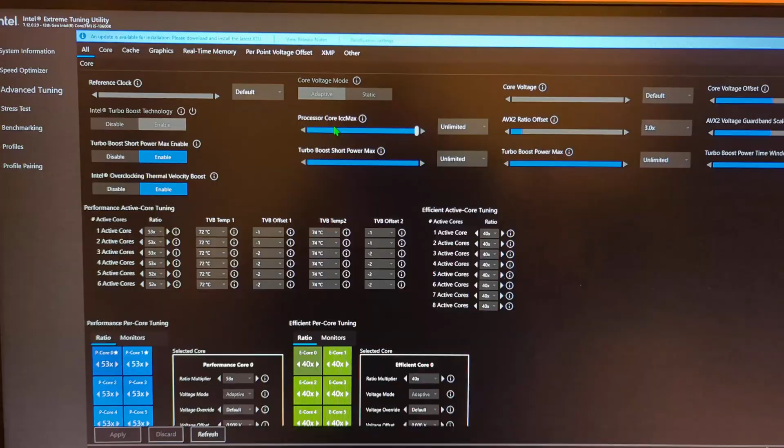It gets it right. Okay, I'm just gonna flip my screen. Sorry about this, guys. Here we go - it's more convenient just to flip my camera like this instead of running a screen capture. But basically, up here, core voltage mode.

You probably see these guys online, and I've done it - I've taken their advice and gone for a core voltage offset to try and drop the voltage. You can undervolt your CPU, but yeah, this is the thing - when you undervolt your CPU, you might come here and think, okay, let's undervolt. No, this is going up.

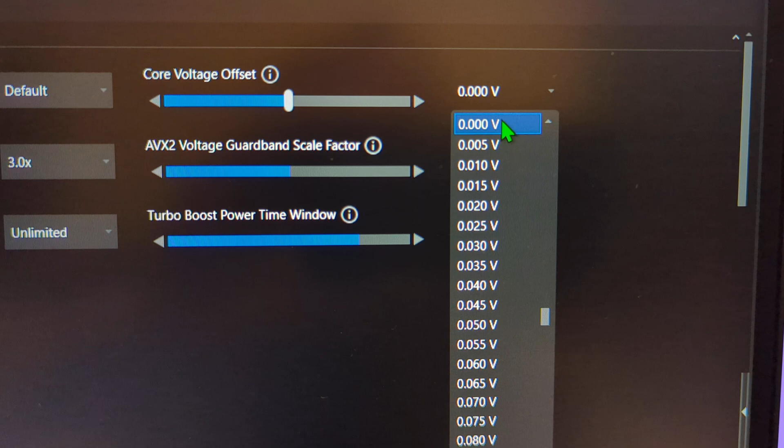Yeah, I've got to mention this, guys - I've made this mistake in the past. If you're looking to undervolt your CPU, bear in mind these are positive figures. This is going up - you'll overvolt it if you just go up like this. You have to scroll up here, there are the minus figures. Don't make that mistake, guys, okay? If you're undervolting, make sure it's a minus figure.

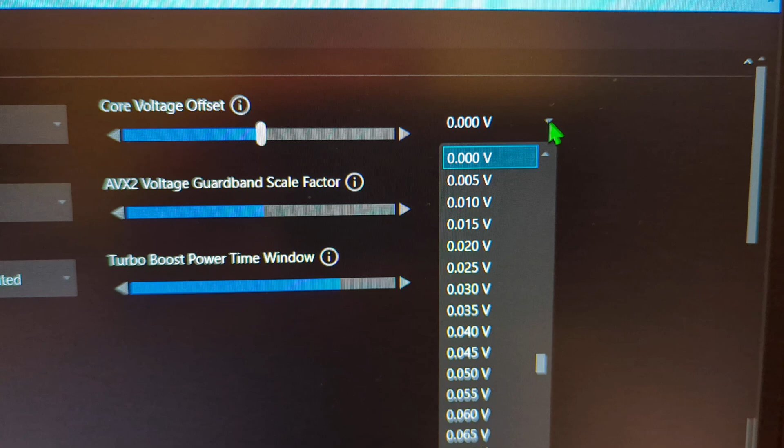It's a little bit confusing because you come here and you can't see the minus figures. I think it should default in the middle somewhere, so you can see, oh yeah, I need to go that way. Yeah, I think it was my office computer - I was like, oh yeah, let's undervolt, going up here. Oh dear.

Not good, especially when you consider you could cause damage to your CPU that way, if you just keep going up thinking, oh, I'm undervolting, but you're not really, you're going the other way. So if you go into undervolt, bear in mind, you've got to go for the minus figures. However, you might want to just leave that alone, because you don't really need to - you're not really going to save much heat by undervolting, you will save a bit of energy.

It's like, seriously, is it worth it when you could change this from adaptive to static? That's what I've noticed, and then you've got all kinds of problems. When you tweak some of these settings - I can't remember if tweaking that changes this automatically from adaptive to static - when it does that, you may experience startup problems. Your computer won't start, and you're thinking, what's going on, you're playing with all these things thinking, come on, what's happened here?

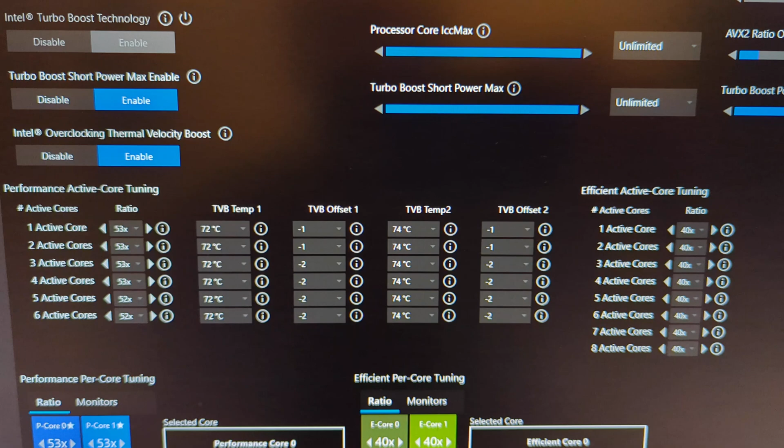Basically what I found was I'd unplug my game controller, for example - I've got a black screen starting up. I just unplug that, or an external hard drive, and then, hey presto, the computer starts straight away. The reason for that is because you're not getting enough voltage. You've been messing around with voltage settings, and now it's changed that from adaptive to static. So when your computer starts, your peripherals are causing it not to start up because you're not getting enough voltage supplied, which is why it's best just to leave that on adaptive. Again, it knows what it's doing, okay?

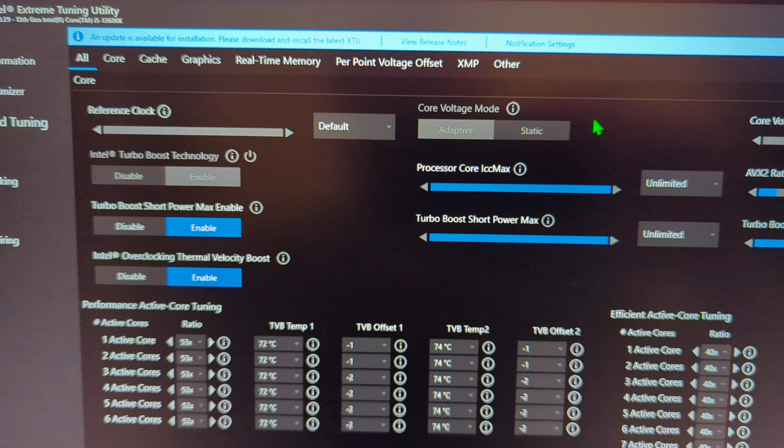Now there's a really cool setting with my motherboard. Actually, my older motherboard, the office one, has this setting, so this one's definitely got it, and that is V-core voltage mode, adaptive plus offset. So there's an adaptive and fixed mode in MSI BIOS, but there's also an option for adaptive plus offset. So you get the best of both worlds.

Yeah, you get to undervolt a bit, try and squeeze as much out of it at the lowest possible voltage. Or if you're extreme overclocking the other way, go a bit more voltage without that coming off of adaptive. So that's great. That's one thing it just knows how to do, okay?

Automatic voltage settings, this adaptive thing. That's because the user isn't going to know exactly how much voltage each and every component in the PC needs 24/7, the whole time it's running. But the system will, so just leave that on adaptive, I find.

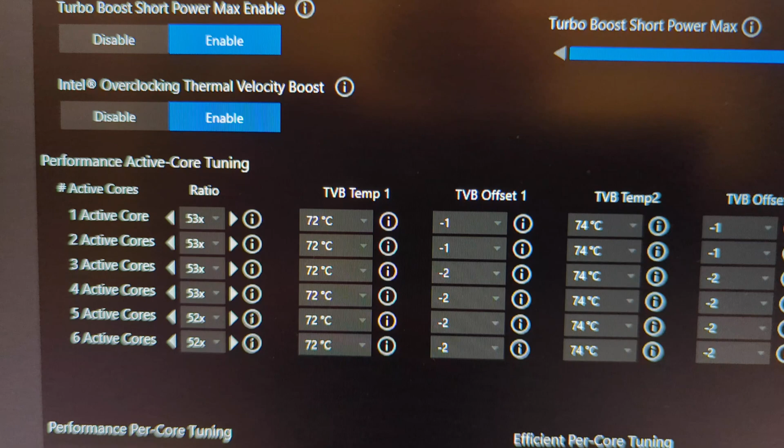Now, the other thing, this is something with previous versions. I don't know if it's because it was early days for TVB, thermal velocity boost, but my older system couldn't get this thing right with thermal velocity boost, where if you enabled it, it would automatically underclock your system by silly amounts, like drop it to less than 1 gigahertz because it thinks it's idle.

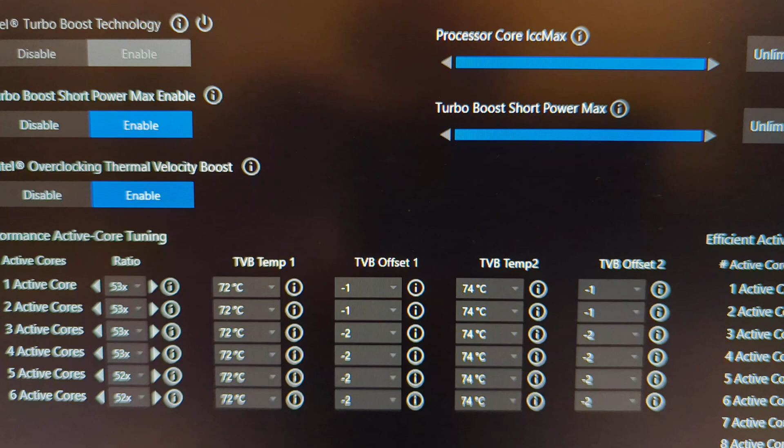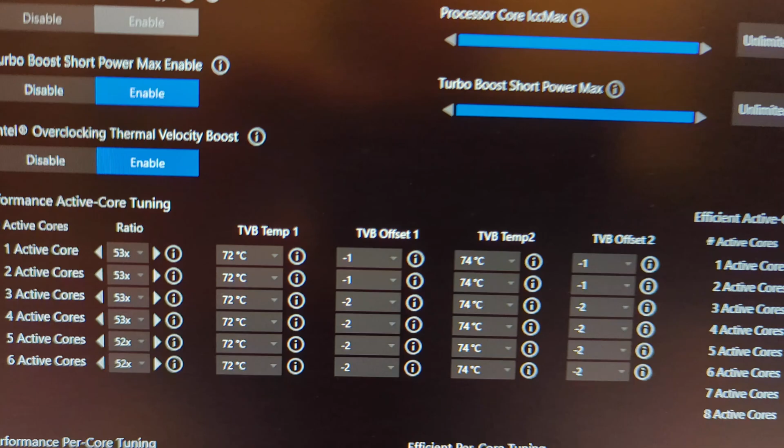Oh yeah, nothing's going on, I'm going to drop it to less than 1 gigahertz, and you're like, what are you doing? Leave my CPU alone. I want it at 5.3 constantly. You don't drop it unless there's a temperature issue, right? But that older system just loved to do whatever it wanted if you enabled TVB, which included underclocking way too much.

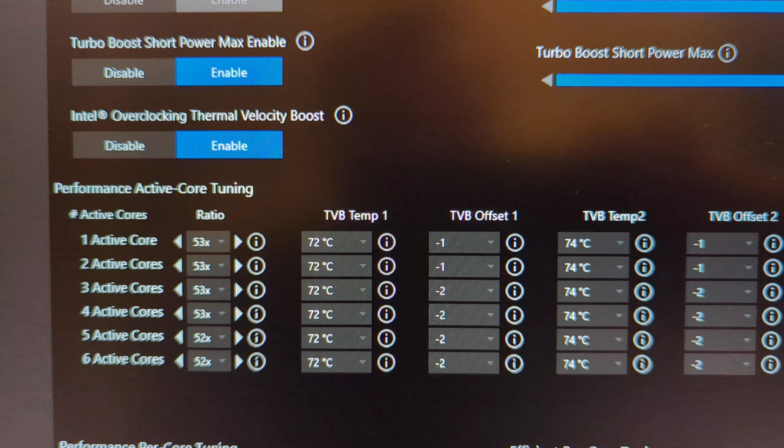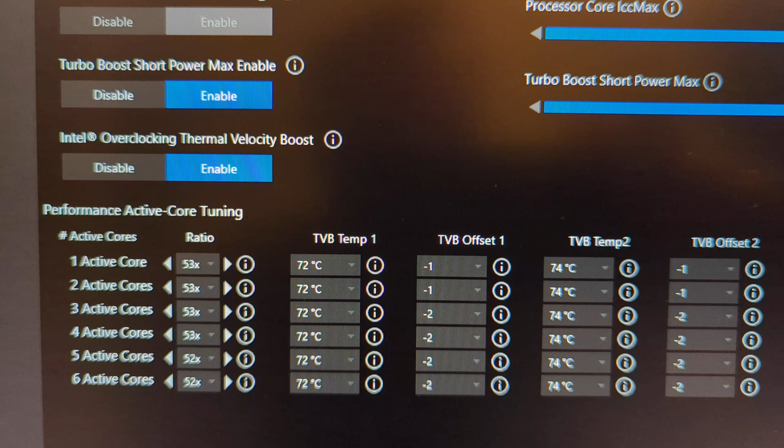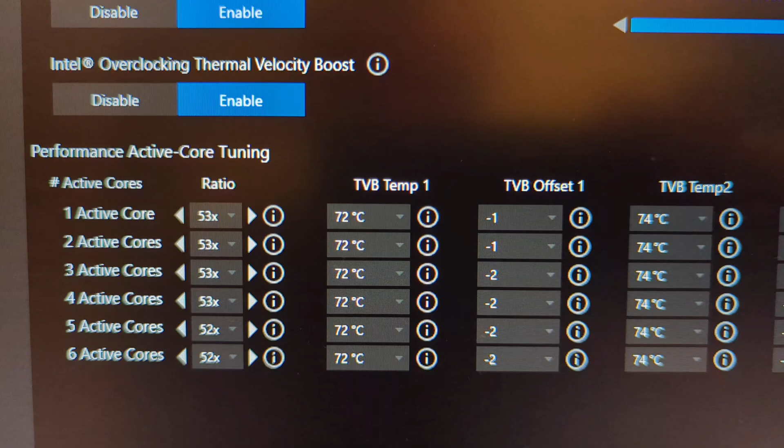However, this newer system, my 13th gen i5, my 13600K, doesn't do that, number one. Number two, it has all these extra epic settings. TVB has come a long way. Maybe it was early days for it, and that's why I couldn't use it with the older system, and I had to settle for a fixed VCore, fixed ratio, because it just didn't know what it was doing.

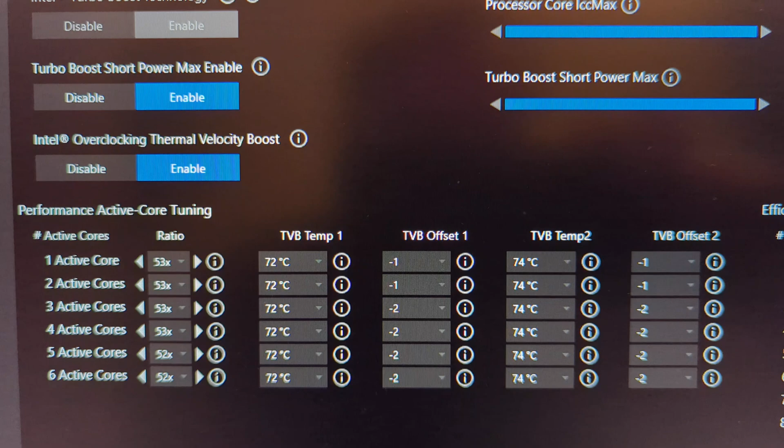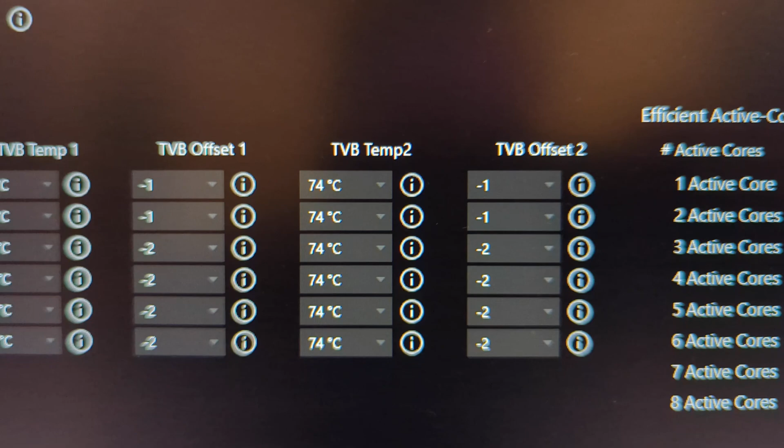Now it does. Now you can enable TVB and say when you get to 72 degrees, drop 1 on cores 1 and 2, active core tuning here, very specific, amazing. Once it then gets to 74, drop another 100 megahertz. But those other cores got hotter than cores 1 and 2, so I've had to tell them to drop a couple of increments each time, 200 megahertz each time. And it gets it right, guys. Really impressed with TVB now.

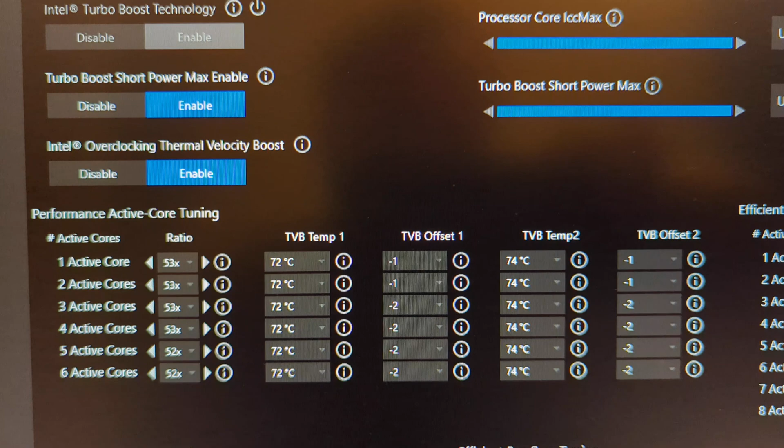But with my older 10th gen CPU, I was a bit shocked that not even the 10th gen CPUs can use TVB to its full potential, that it was still early days, and you don't get these offsets. Even when I went in the BIOS and tried to do it that way, it just wouldn't get it right.

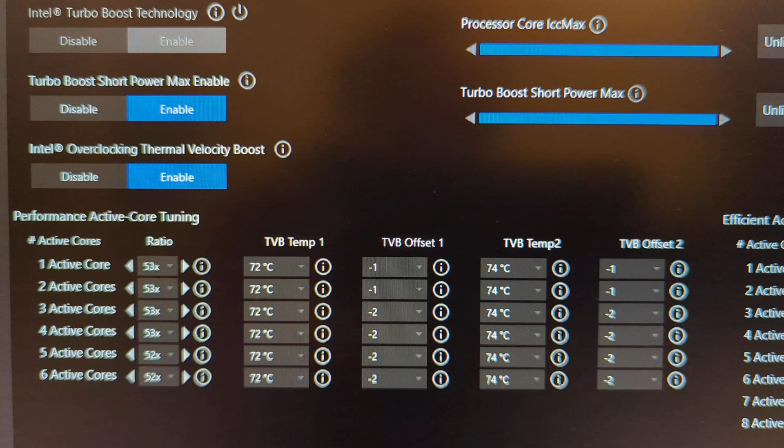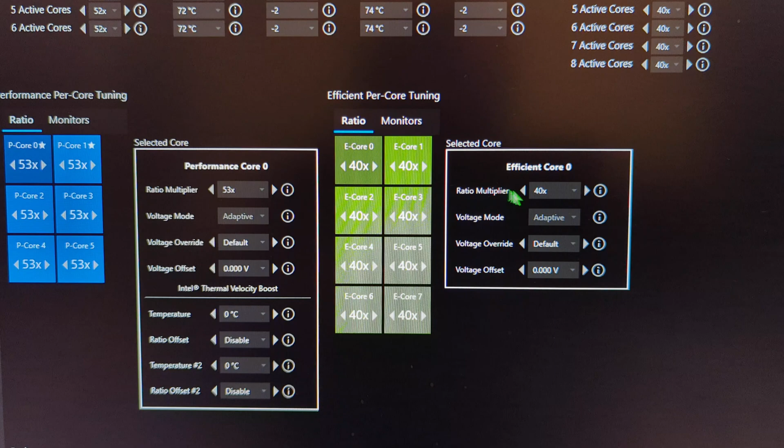Anyway, there we go. Quick video. Best way to go is leave everything default. Don't play with this. It defaulted to 4.5 with processor cache ratio, and me, being an idiot, thought, why is that at 4.5? It needs to match my active core tuning up here. It should be 5.3. No. Perhaps with other CPUs I've had, but not this one.

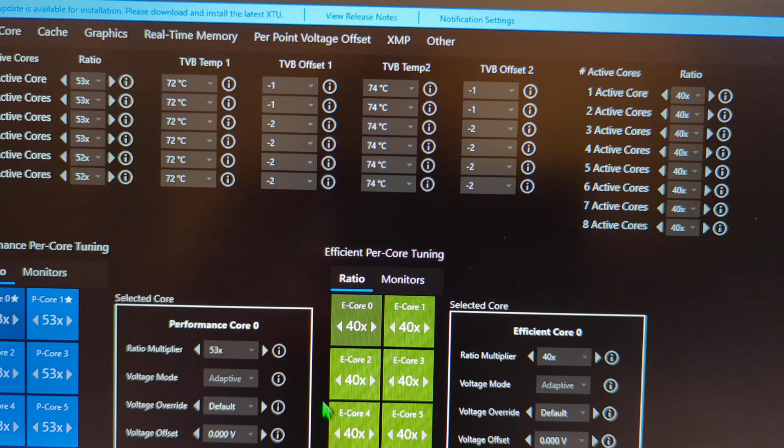When it resets your overclock settings, you'll find that it's set this to 4.5. Leave that alone. Don't play around with this, don't try and match it. Leave that and that default, and just tweak these. We've got 5.3 on cores 1 and 2, 3 and 4 as well. I've got a new fan and managed to drop the temps a bit, so I went quad core 5.3.

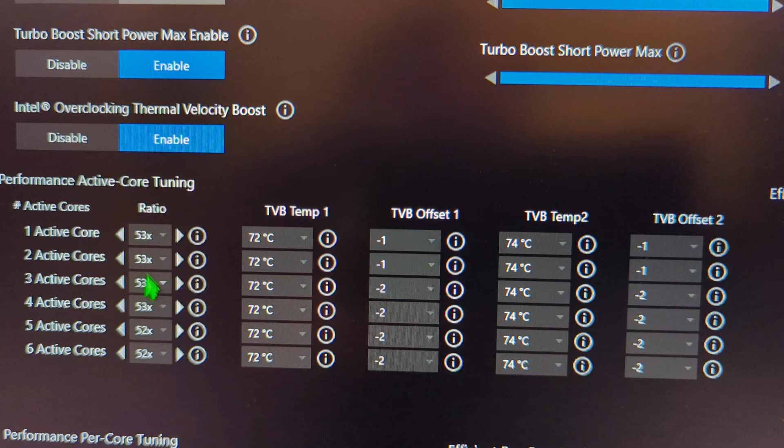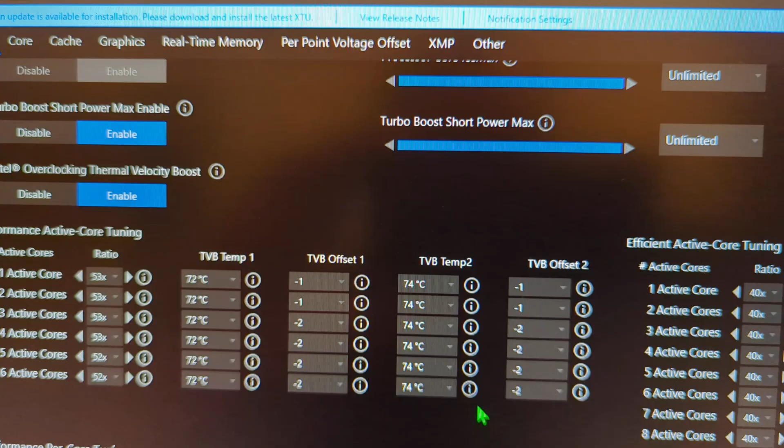And whichever cores get too hot, drop the increments a bit more. With these settings, I don't exceed 84 degrees, and if I did, I'd probably underclock, and that's in Cinebench, guys. Now, I think it's even a bit less. What did I get the other day?

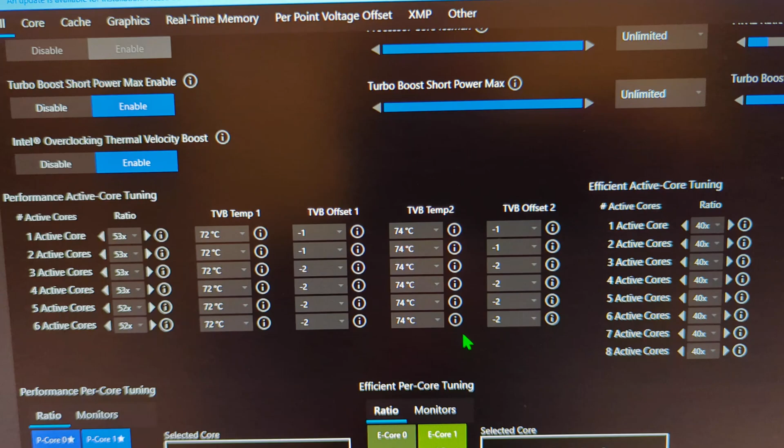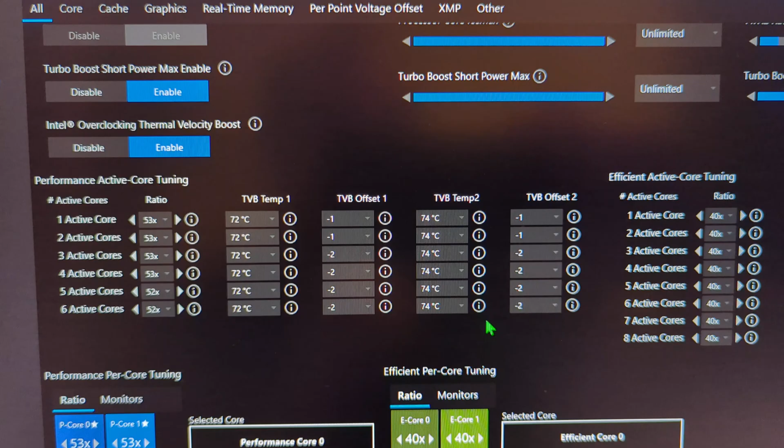I got a new fan, a Noctua, premium fan, and it actually dropped my temps. It was a case fan. I put it on the side of my case, pointed pretty much directly at the CPU, and it dropped the temps by 7 to 8 degrees. It was amazing. I was getting 85 degrees temps.

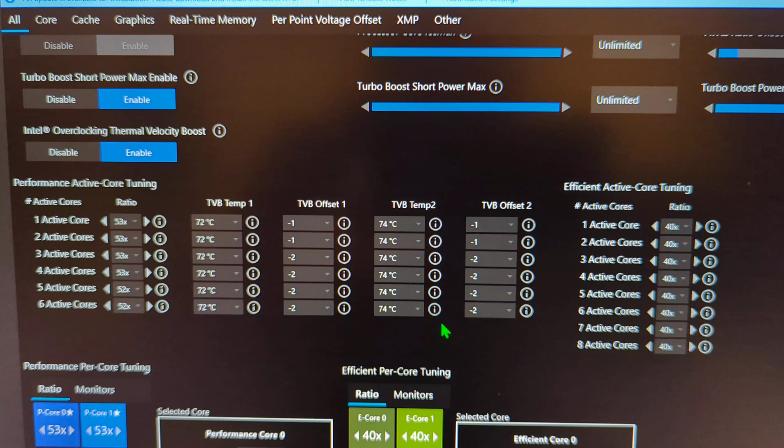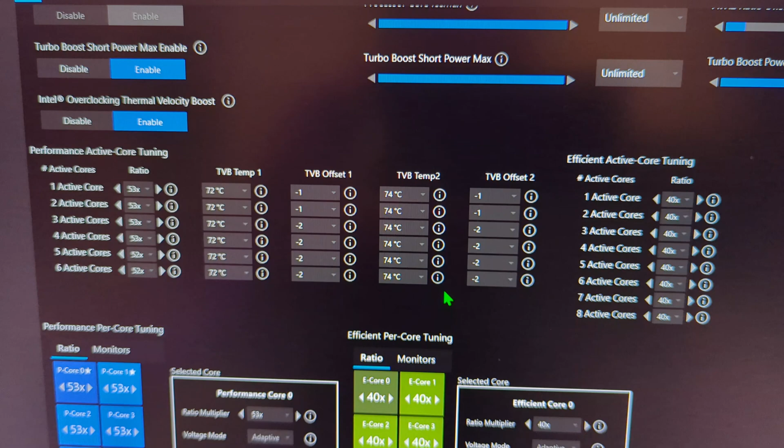When I fit this fan, 77. Full load, Cinebench. Although Cinebench, it's not a foolproof benchmarking tool. It doesn't stress test it as much as some games will, which I was surprised at. I thought this must be some kind of 4K video rendering thing, or even 8K, if it's really stress testing the PC. Okay, if it passed Cinebench and I get decent temps, I'm alright.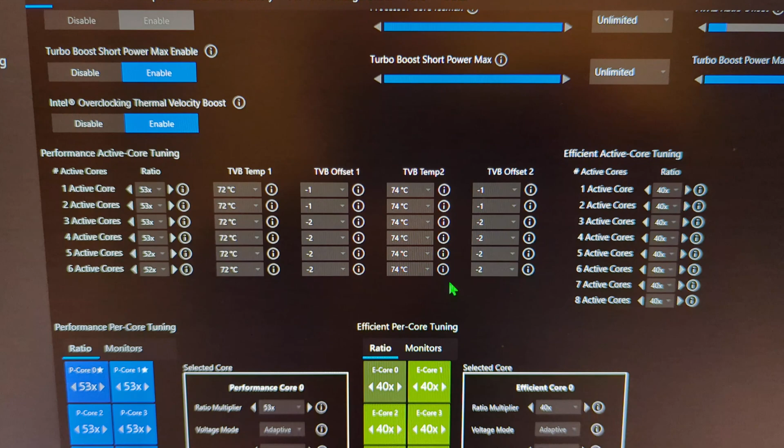But I've had instances where I put a game on, and that does stress test it more than Cinebench. So yeah, test it also with your most demanding game. For me at the time it was Warhammer 1. For some reason that gets hot. Yeah, which is interesting because Warhammer 2 doesn't. Yeah, I think it's just inefficient. Warhammer 1 is making the system unnecessarily hot. But yeah, I test with Warhammer 2 now because I'm not really playing Warhammer 1.

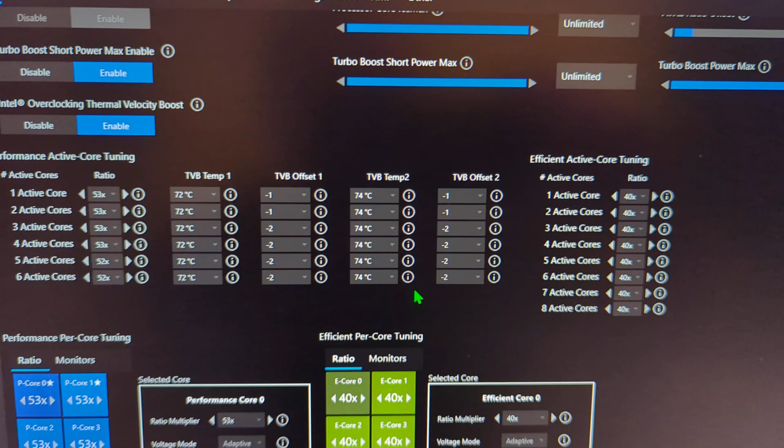Back in the day, here we go, show my age here. Back in the day, it would be, can it handle Command & Conquer 3 Brutal Skirmish? If it could handle Command & Conquer 3 Brutal Skirmish, it could pretty much handle anything, okay.

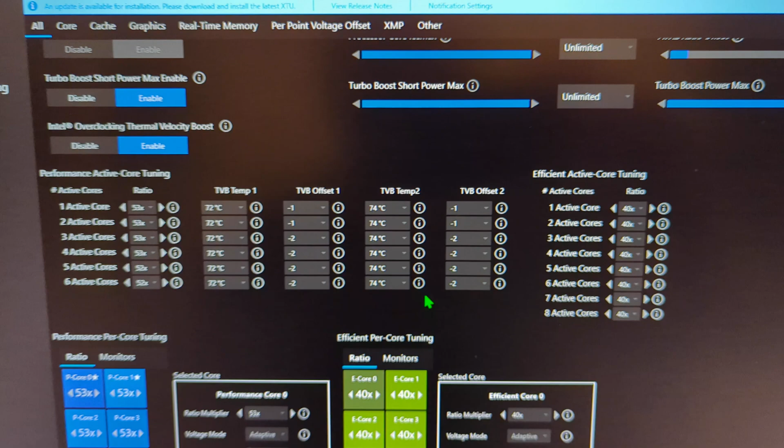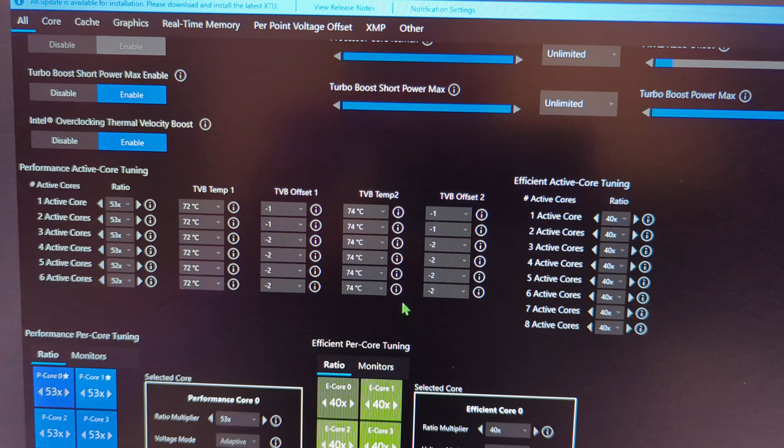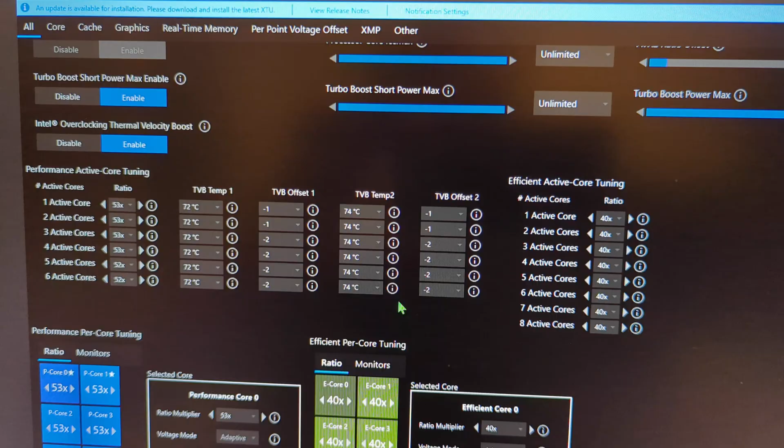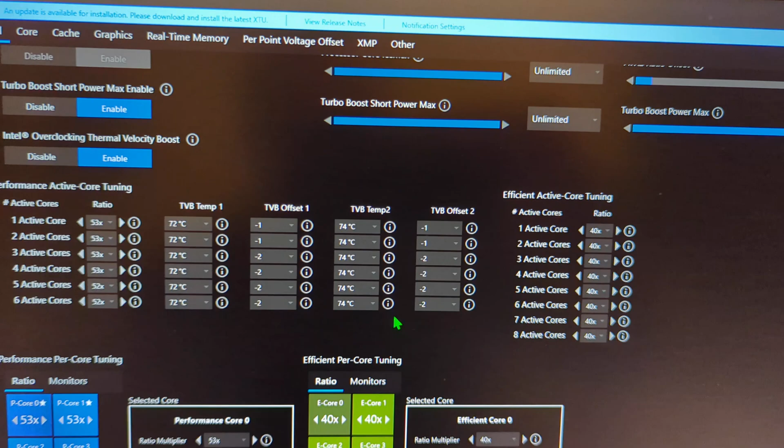I mean, I rate Command & Conquer 3 as one of the best games. And you probably think, well, why? It wasn't that great. It's because of that Brutal Skirmish mode, guys. Play Command & Conquer 3 on Brutal Skirmish and you'll know what I'm talking about, if you can handle it, that is. Yeah, if you're good enough. I found out how to beat AI a long time ago. You find its little weakness, you cheat essentially, as AI does way too often. But it's not really cheating, it's just strategy. You find a strategy that works and you double down on it, and you do so as quick as possible so that it can't adapt. That's how you beat AI. Maybe not in the future though, because it will be too good at adapting. Oh dear. Now, I'm going to tell you how to win on Command and Conquer 3 Brutal Skirmish. If you're playing as Nod, get as many of those Venom Viper aircraft, up to 50, and then just right flank the enemy. You'll come into their base, they'll be unprotected on one of the flanks, and you can just blitzkrieg the guys. That's how you win, even if it means sacrificing some of your base to do it. It's tactics like that is how you beat AI, okay? Yeah.

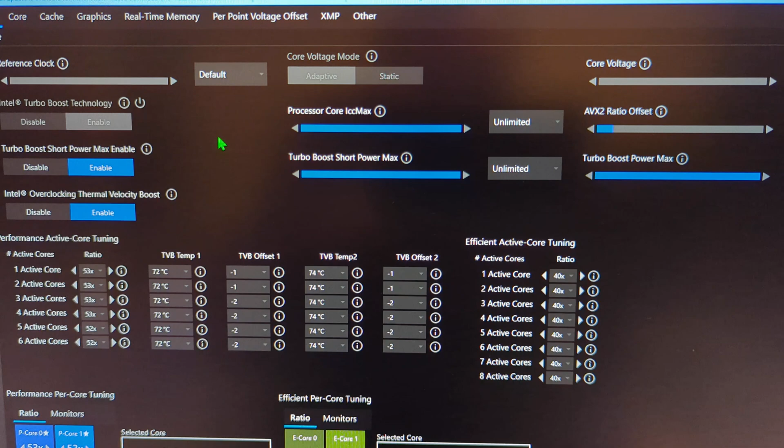Anyway, there we go guys, another video on how to overclock and make the most of Intel Extreme Tuning Utility. Download this guys, okay, it's epic. Oh, I've got an older version here. The office one is 7.14. And trust me, I've tweaked so much trying to get anything to work, everything and anything. And just leave that on adaptive, okay. It's the best way.

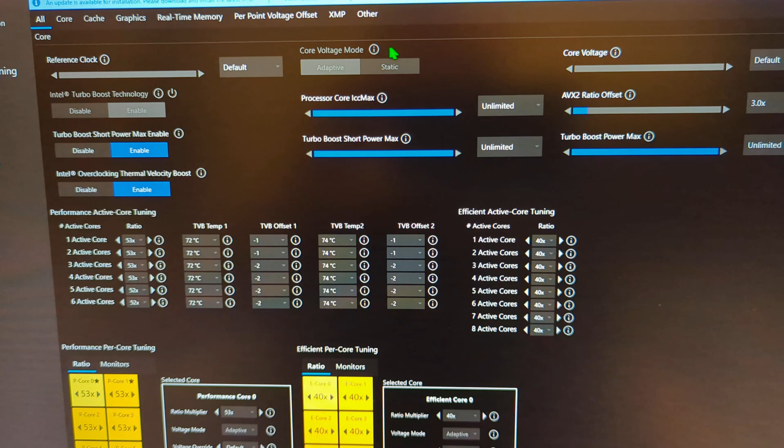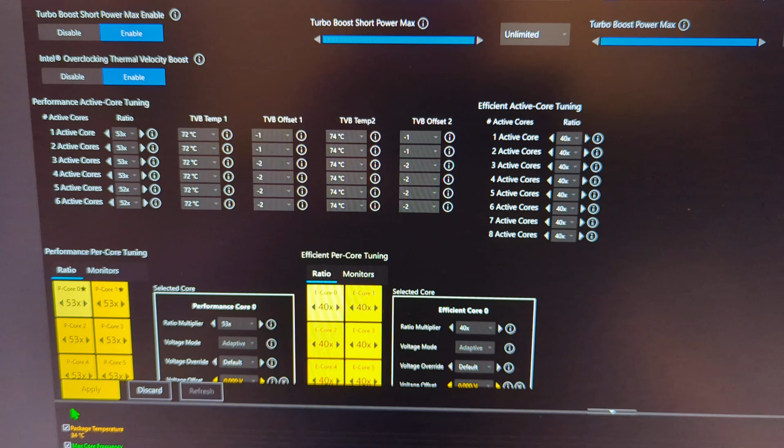Only undervolt if you absolutely have to, and bear in mind it might switch that to static, which you don't want it to do if you start tweaking here. I'm not sure if that's the case with the... Okay, let's just undervolt a tad and see, is it going to switch that from adaptive to static? It might not on this one. No, good. It must be set to adaptive plus offset. So I could drop this a bit, but I'm not going to. Yeah.

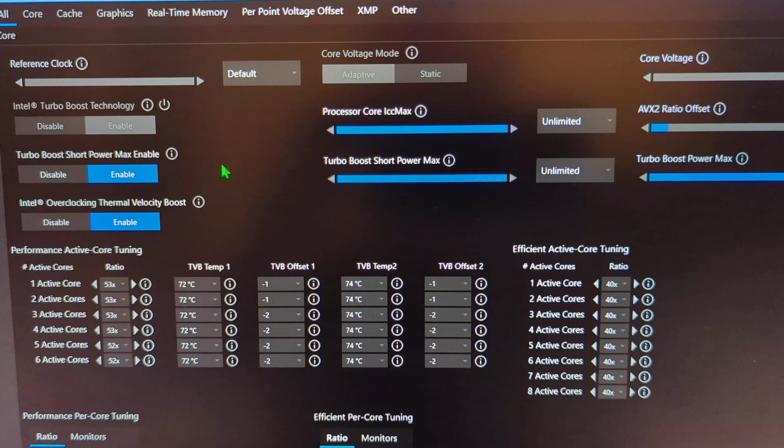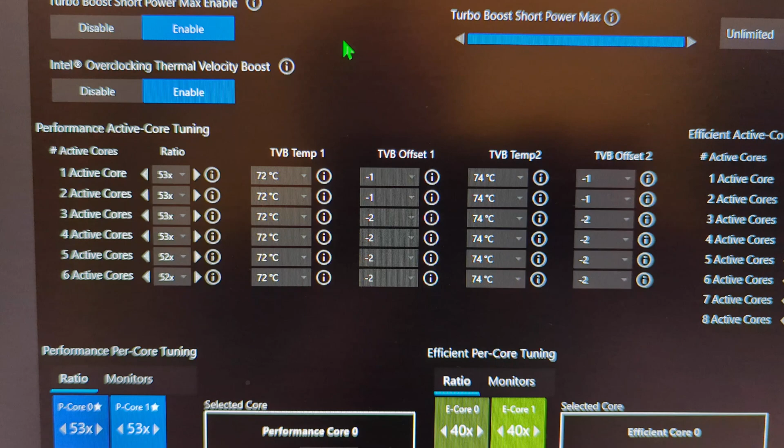And if you're using an older CPU, you may have to settle for fixed override. But the problem with that is, if you've got to do that because it doesn't offer stuff like this, then you can't really get the best overclock. I think nowadays you've got to go for a 13th gen so that you can get a great overclock out of it using these settings, which you don't get with my 10th gen. I don't know if it's just me, but my 10th gen i9 in the office doesn't have these options. Yeah, gutted.

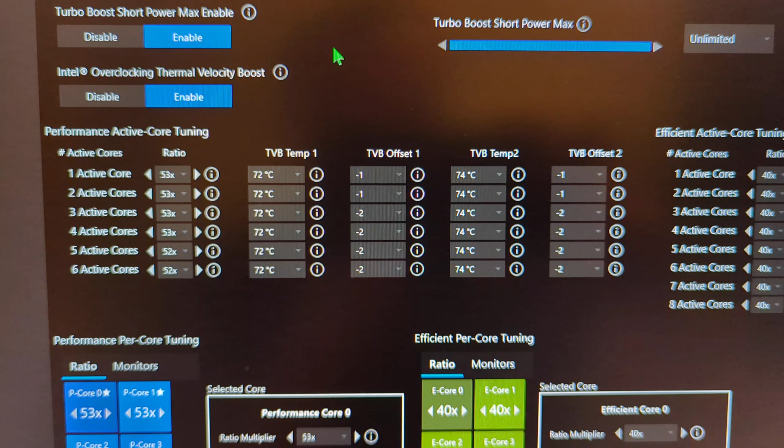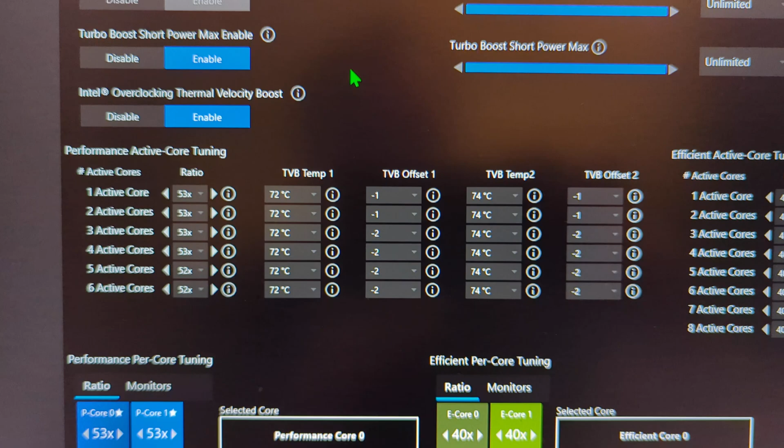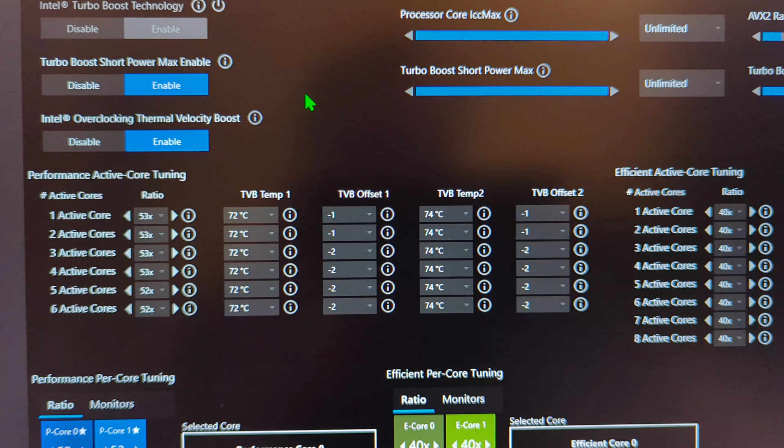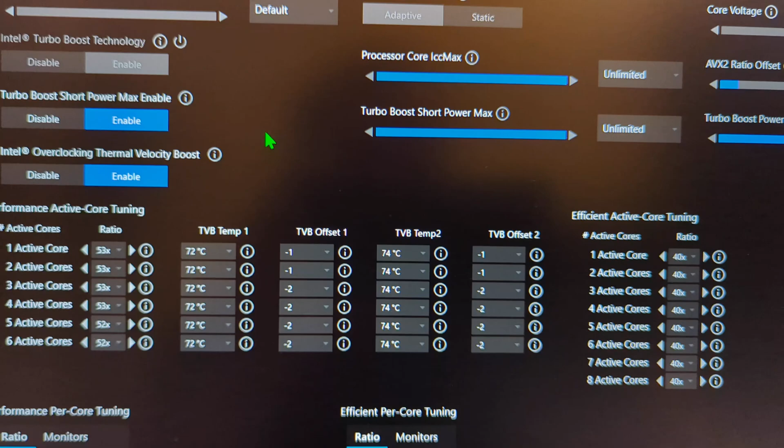So I've had to fix it at 4.6 gigahertz, which should be doing 5 at least. But because I can't fine tweak the temps like this, 4.6 is the safest I can leave it at, because of the temps it reaches. I've got it stable at 83 degrees C, running Cinebench 2024, at 4.6 fixed. But I really wanted to do this with it, like I can with my 13th gen i5.

Again, another great reason to use thermal velocity boost. What did it do there? 5.7. It likes to boost it to 5.7 now and then. Nice, thank you very much.

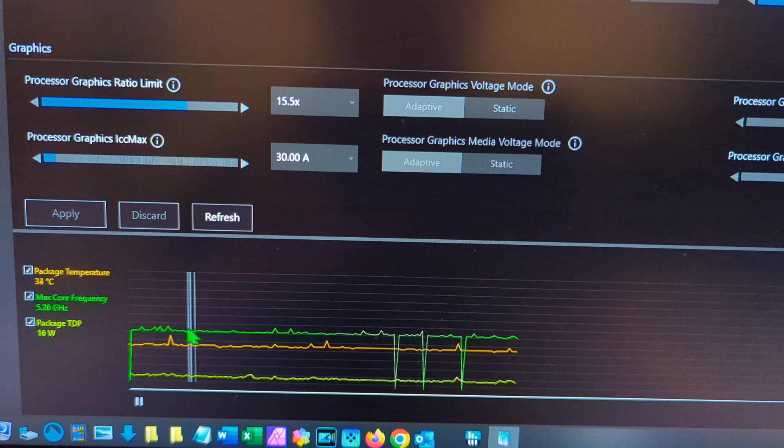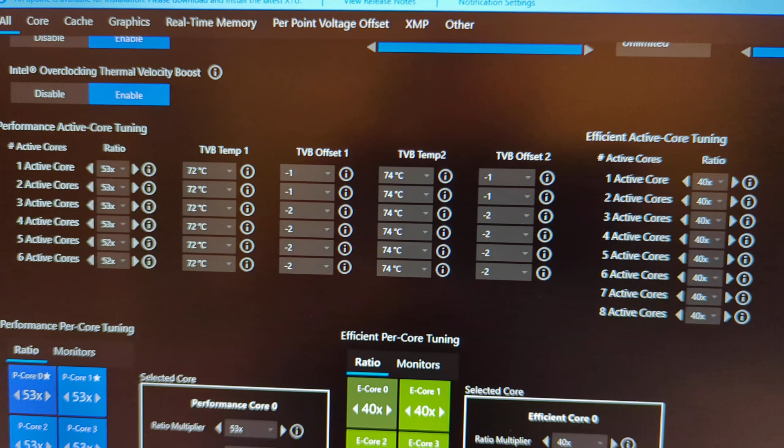But when at full load, like if I started running Warhammer 2, I think it would reach, temp wise, it'd reach here pretty quick, okay, and it would drop it, cores 1 and 2 to 5.1, yeah, but the other cores it would drop it to 4.9, yeah, you see that? Yeah, 5.3 minus 4 total.

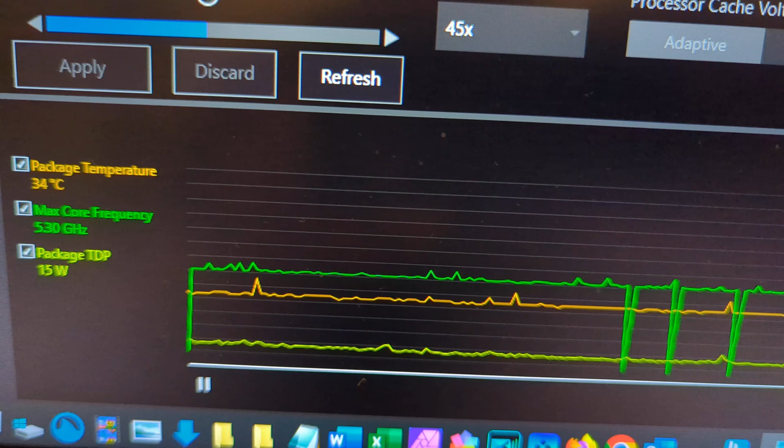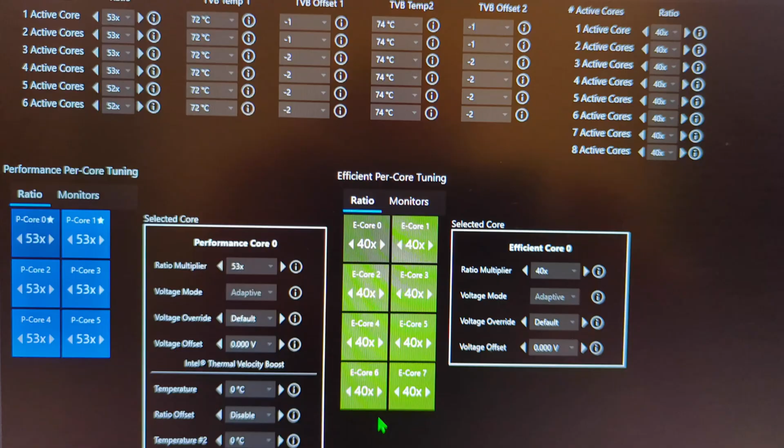So when I'm running Warhammer 2, it tends to drop it to 4.9, and you'll see that here, okay, it'll be a steady 4.9, but again, occasionally it'll boost it, yeah, little boosts, even when I'm at full load in Warhammer 2, so that's good, yeah. It knows what it's doing now. Great. I don't have to override everything.

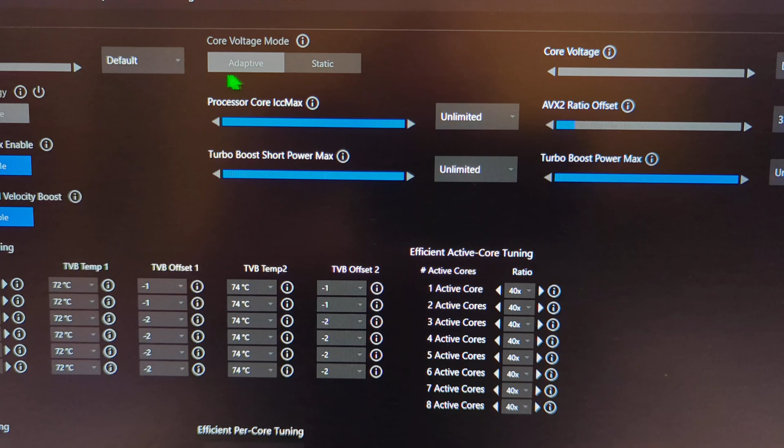There you go, guys. There's some settings that will work. You won't have mysterious problems with your computer starting up and having to unplug 1 or 2 peripherals just so it'll boot if you leave this on adaptive, okay? If you don't want to be pulling your hair out, messing around, oh, what's going on now, just leave that on adaptive, or even better, adaptive plus offset, so you can still tweak this, yeah, and not have to worry.

Alright then, guys, there we go, another video on overclocking.